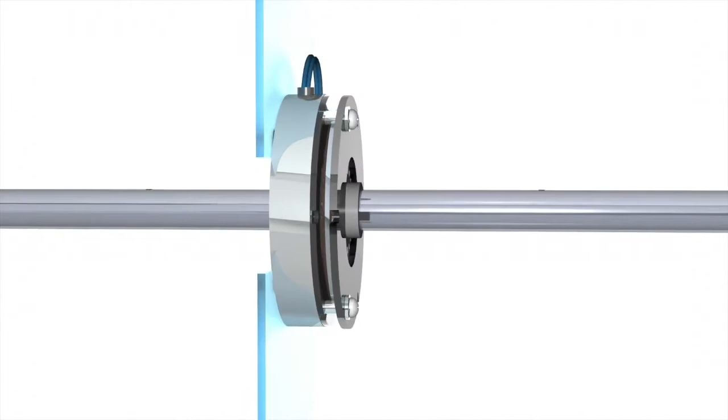Electric spring-applied brakes, or electromagnetic direct current single-disc spring-set brakes, are the most common type of holding brake produced. They are designed to stop and hold a rotating shaft, or simply hold it in place. Their function is opposite from a traditional electromagnetic brake: when no electric power is going to the brake, it is considered engaged and holding. The two main reasons for using these brakes are safety and accuracy.

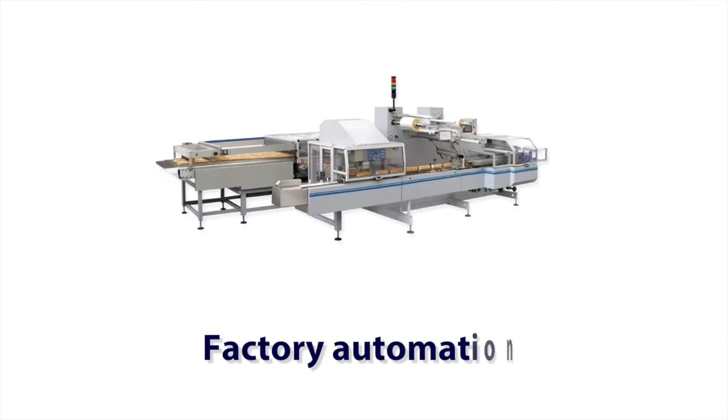Common applications include medical equipment, robotics, factory automation, servo and stepper motors, elevators and escalators.

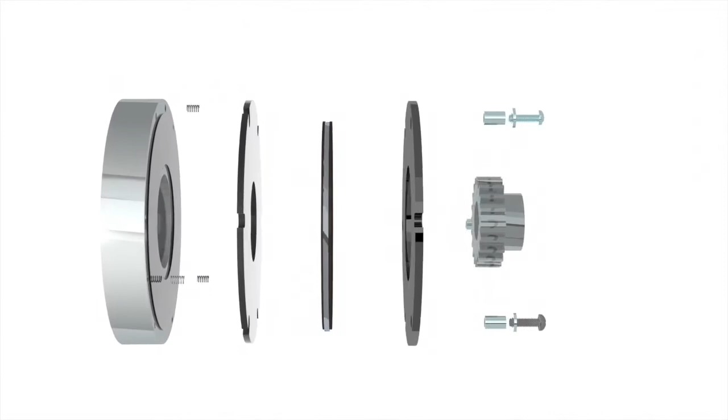The key components of the brake are the coil, springs, pressure plate, friction disc, cover plate, and hub.

Spring-applied brakes transmit torque via spring pressure and use an electromagnetic field to release the spring pressure. Brakes are engaged mechanically and disengaged electrically. When voltage or current is applied to the brake, the coil becomes an electromagnet.

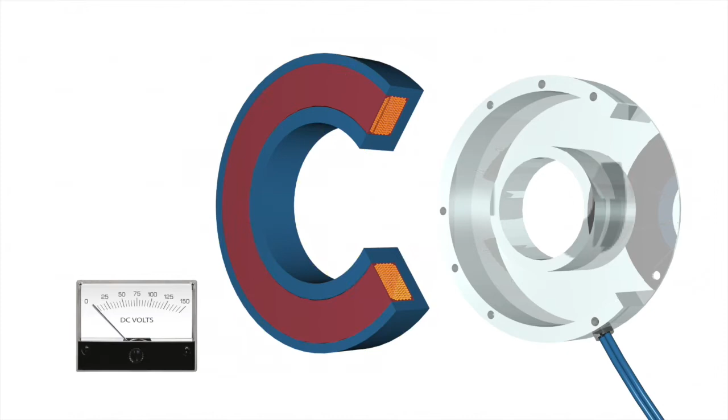This produces magnetic lines of flux. This flux travels through the small air gap between the pressure plate and the field coil, attracting the pressure plate to the coil and compressing the springs, releasing the friction disc so it is able to rotate.

When power is removed from the coil, the pressure plate is released and the springs push the pressure plate against the friction disc, trapping it between the pressure plate and the outer brake cover plate. Since the hub is attached to the friction disc, the hub and the shaft going through the hub are either dynamically stopped or held in place.

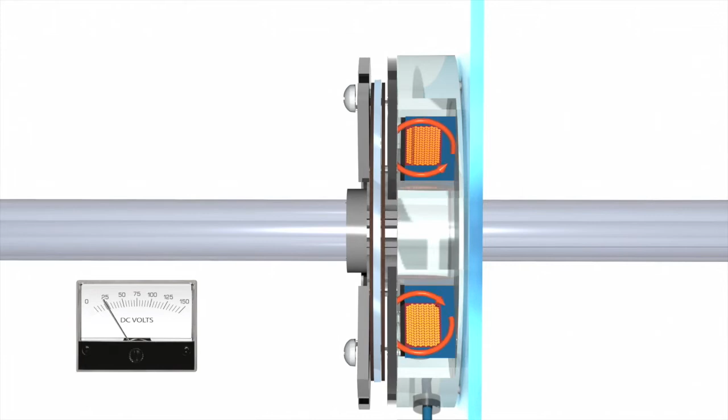The difference between the two is that during dynamic stopping, heat is generated, so the brake and friction material have to be sized to handle the energy during braking. With a holding-only application, only the static torque needs to be considered.

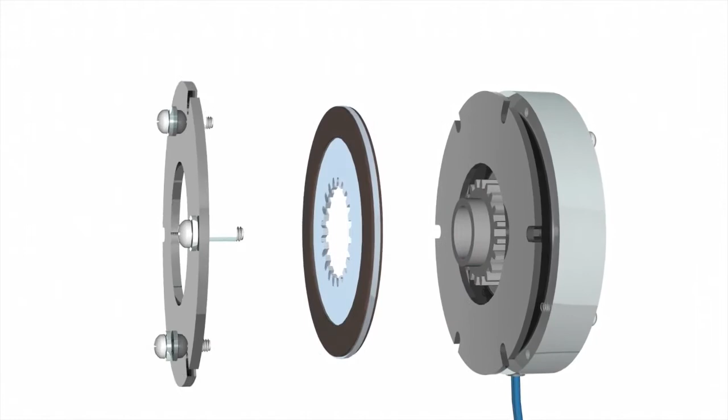Depending on the brake and its function, different types of friction material can be used. In most applications, the friction material is free to move over a square or spline on a hub that is fixed to the shaft. There is a slight clearance or backlash between the hub and the friction disc.

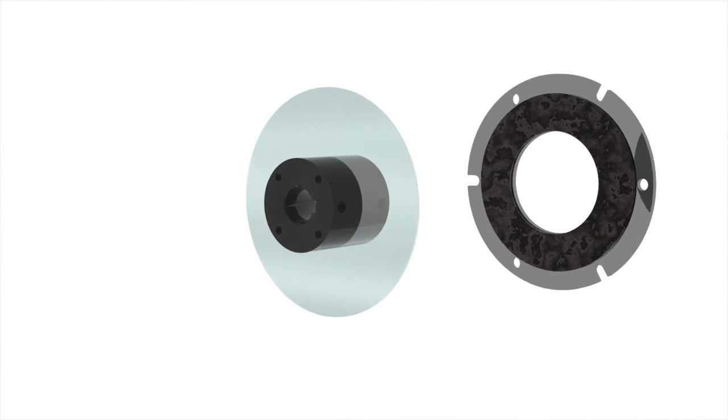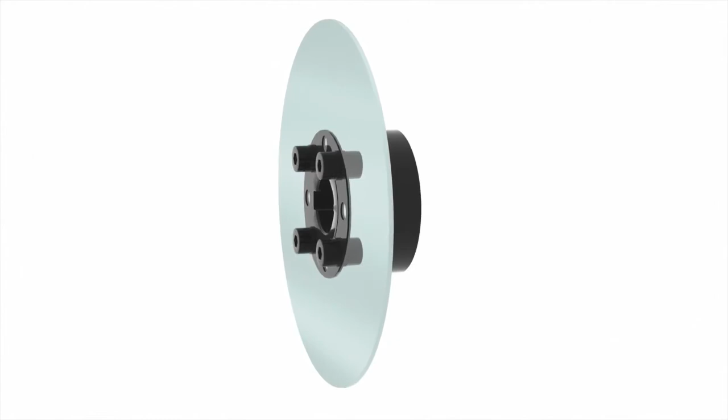For zero backlash applications, the hub is directly connected to the spring steel disc. In these types of brakes, when the friction discs are held, there is no backlash movement at all. Backlash can be critical in high-precision applications like medical equipment or microchip processing.

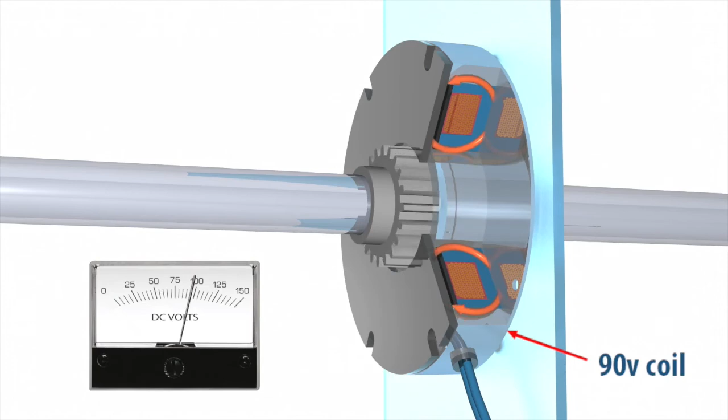Brake coils are normally 90 or 24 volts, but there is a wide variety of specialty voltages available. Different controls can also be used with holding brakes.

Over-excitation can provide a faster response. For power savings, reduced current controls are available. Since most of the current is required to reach across the air gap to the pressure plate, once the pressure plate is engaged, current can be reduced significantly to reduce power consumption of the brake.